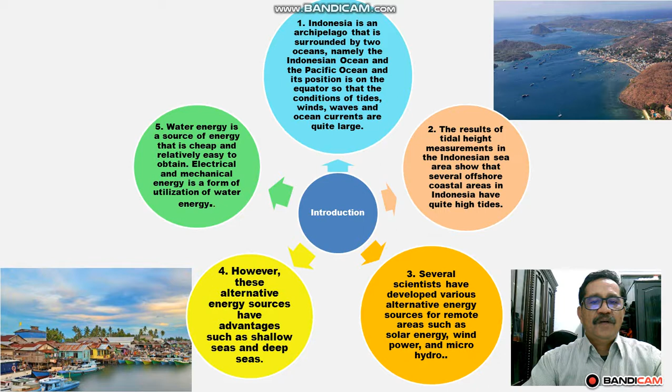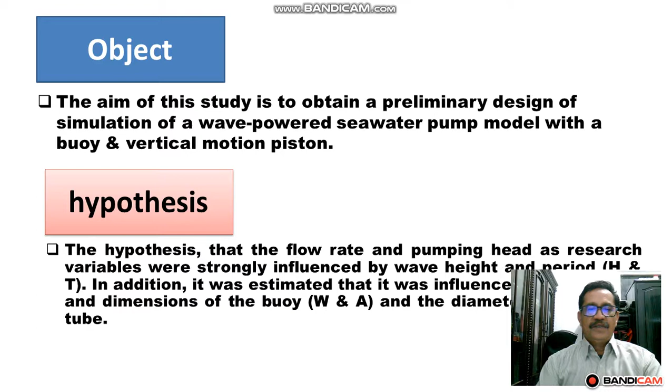Objective. The aim of this study is to obtain preliminary design of simulation of a wave-powered seawater pump model with a buoy and vertical motion piston. Hypothesis. The hypothesis that the flow rate and pumping head as research variables were strongly influenced by wave height and period, H and T. In addition, it was estimated that it was influenced by the weight and dimension of the buoy and the diameter of the piston tube.

Methodology. This research was conducted at the Coastal Engineering Research Laboratory of the Department of Civil Engineering, Faculty of Engineering, Hasanuddin University. The wave channel is equipped with a wave generator made of steel flume with length 15 meters, width 0.30 meters, and effective height 0.5 meters.

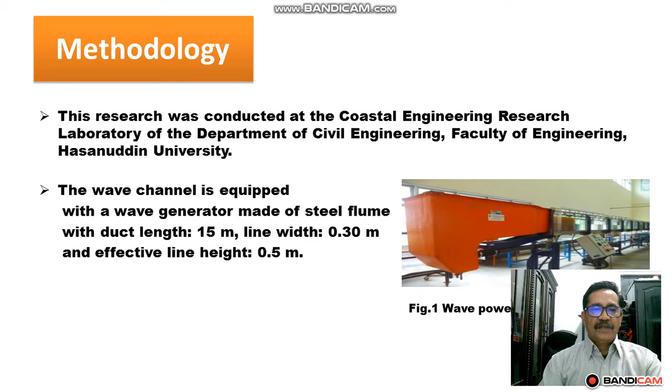Table 1. Model of the float type wave pump. Tube diameter 2.0 cm, tube height 50 cm, upper lower inlet hole diameter 1.7 cm, upper bottom outlet hole diameter 0.5 centimeter, buoy weight 1.0 kilogram.

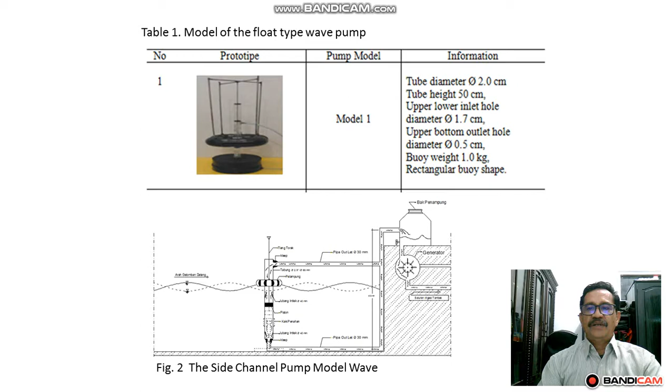Simulation. Preparation for the initial running of the flume. To obtain initial data, namely: 1. With a stroke wave generator 6, 7, and 8 to get the wave height. 2. The period T1 13 seconds, the period T2 14 seconds, and period T3 15 seconds.

Filling water of the wave flume, water depth 29 centimeter for each model. Change the water pressure level head at the outlet hole as high as 5 centimeter and its multiples until the pressure level no longer releases water.

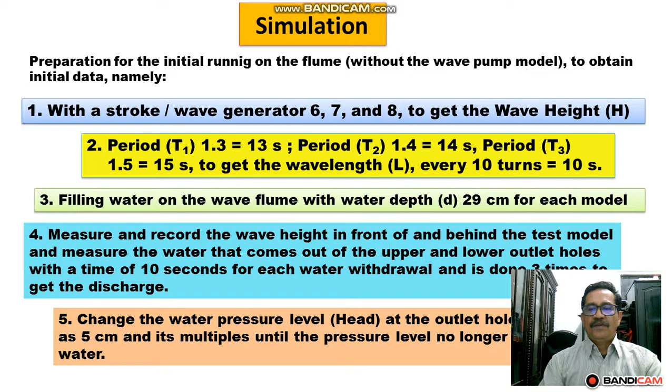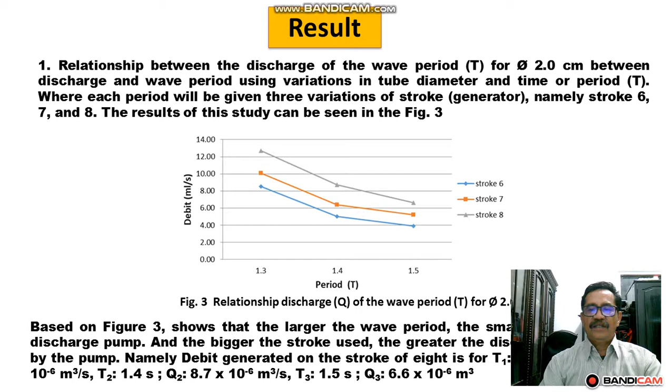Results. The first relationship between discharge and wave period for diameter 2.0 centimeter, using variations in tube diameter and time or period, namely stroke 6, 7, and 8. The result of this study can be seen in Fig 3. Based on Fig 3, the larger the wave period, the smaller the resulting pump discharge, and the bigger the stroke used, the greater the discharge generated by the pump.

The second relationship between the discharge and the wave period T for diameter 2.5 centimeter. Based on Fig 4, the larger the wave period, the smaller the resulting pump discharge, and the bigger the stroke, the greater the discharge generated by the pump.

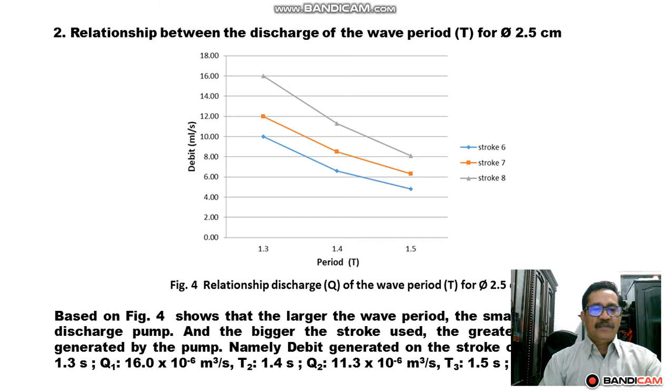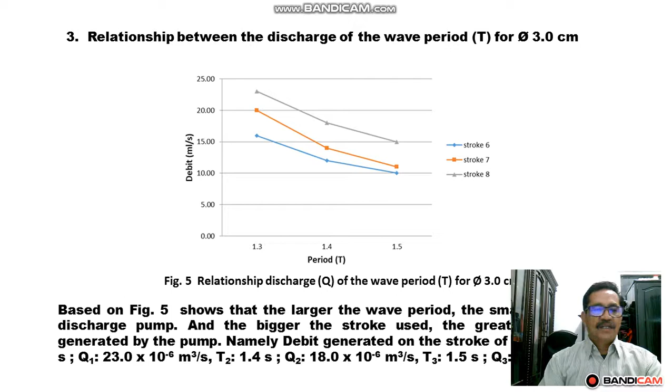Conclusion. From the results it can be concluded that the diameter of the tube greatly affects the resulting pump pressures. The smaller the diameter of the tube,